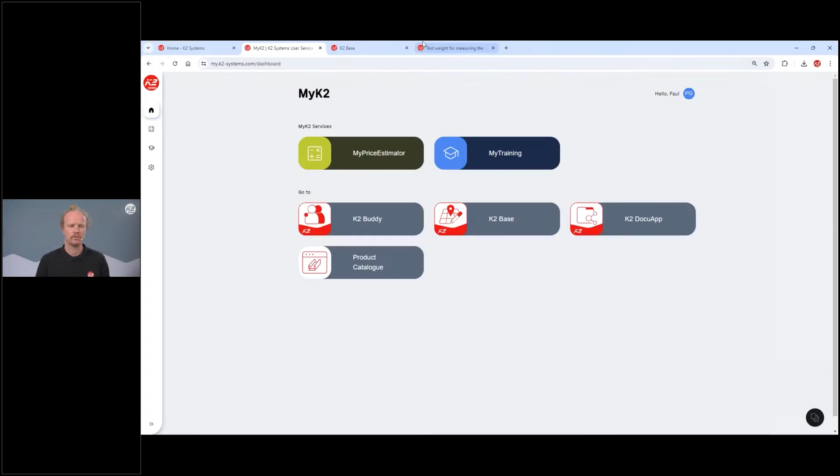So going down to K2 Base, you can click it this way. It doesn't really like it when you have two pages open, so we'll just close this one. And now I'm in my K2 Base account.

These are some of the projects that I have made, or we have made as our webinar team. However, we also have the option of looking at projects from other people in the company. So if you have a company of 10, 20, 30 employees, they can all have their own Base account. From there, you can access projects made by other people in the company and work collaboratively on those projects. Also a great way of sharing, if someone is sick one day and you need to get that project finished on time, you can continue their work who have already started it.

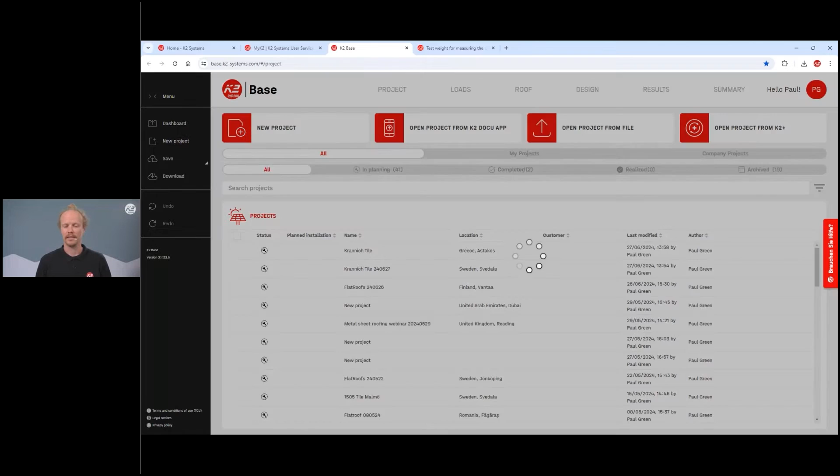So to start a new project, we can jump back, just to the all projects page. You can start a new project here. I've already begun one, there was one this morning that we did with the German team, but we're going to just start one in Greece today. So the location... oh, we've already got a bit too far, let's delete everything and start right from the beginning. I think that's a good idea. So we have one on one of the islands in Greece, I believe, and we can put a name to it.

We're just going to call it Krannich tile webinar today. If we had information we wanted to provide for our customer, we know who they are, we know when it might be planned, we can put in this information that makes the project look a little bit nicer, a little bit easier.

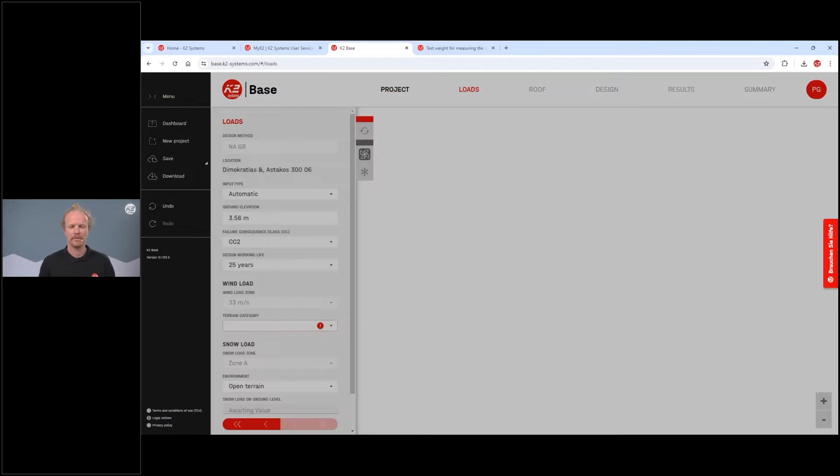However, this doesn't necessarily mean anything for the static part of things, and that's probably what we're most focused on today, the static side of the PV installation. So for this one, maybe Klaus, the man behind the camera, can be our contact person, and we can put some details in for that. But moving forward, we need to know what is going to occur on our rooftop when we're putting PV.

For many countries within Europe, there are the European standards, which are an overlaying set of requirements. It's not so much a suggestion, but a minimum required standard which things should be built to. So if you have any problems in the future, you can say, I have built to the European standards or country-specific standards. And if there's an issue with products, insurance, or whatever, you can refer back to that document. These standards are a little bit different in each country, but the general feel is the same.

You have a wind speed or a snow load. In Greece today, we're probably not going to have too much snow, but we have a wind speed that's expected in this region. And we need to know what sort of terrain is around, because wind in a really open space is going to act a little bit differently than in a closed space.

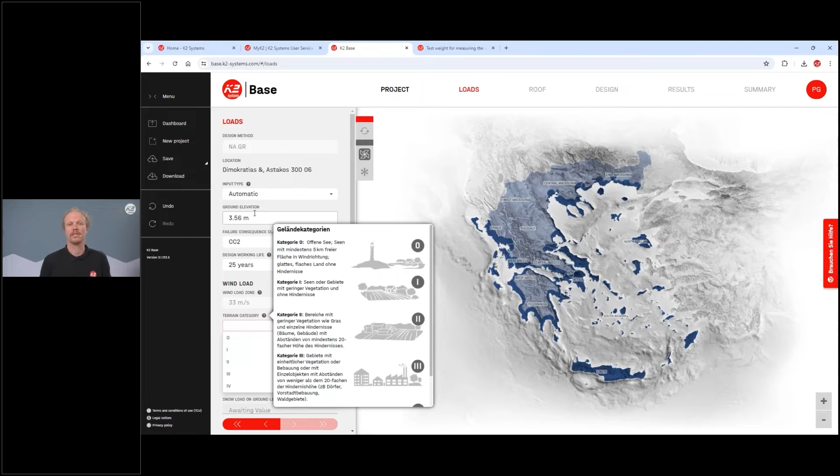So if you think about it in terms of a calculation we're trying to solve, these are all of our inputs that we need. They are set: your project will be at a specific location, your project will experience so much wind, and it will have a specific terrain category. So here we're right on the coast, so we can select number 0 for the terrain category.

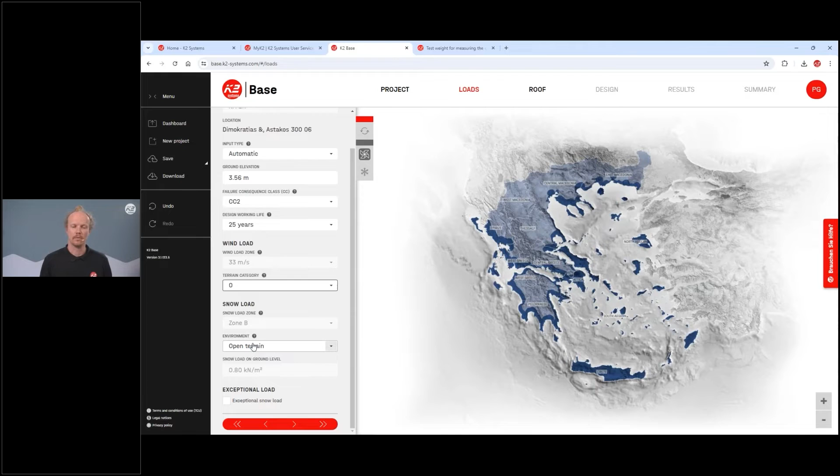In the snow sense, it's not so much of an issue here, but if you're in a more northern region, or in a mountainous region where snow does exist, the same sort of things happen. So the map will be a little bit different for how much snow is expected. There's also information about the topography of that section. These are all taken from the Eurocodes and the National Annex, and this is sort of the safety net that ensures that the product, if installed correctly, will be securely placed on the roof.

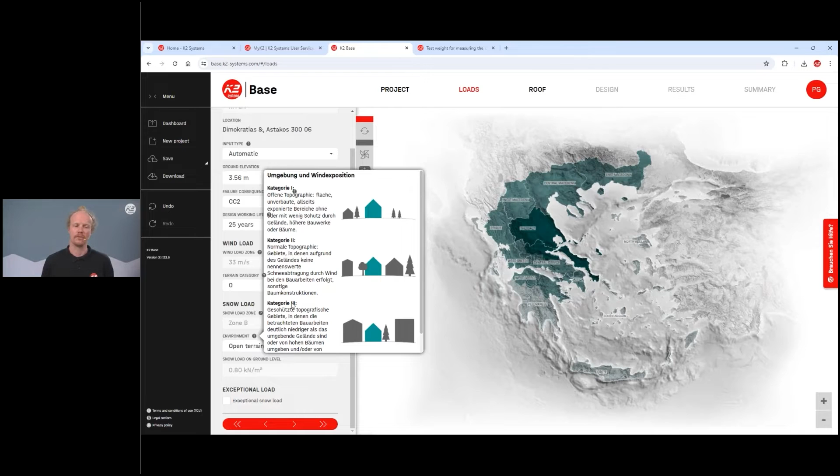There are a few things you have to choose as an installer or project manager about how much safety you would like to add to the roof. These are all also defined by the Eurocode, and they relate to the design working life. So you can have a 25-year working life or a 50-year working life.

Of course, if there's any information, it will pop up. Here it has popped up in German, but that's only because my computer is in German. However, my base account is in English. So if your computer is registered in English, or in one of the 30 odd languages we have input in base, you will have this information in that specific language.

Also important is the consequence class. So here this is an input. Again, unfortunately it's taken from German for this webinar, but if you open it in your base account, it should open up in English. It provides a little bit more information from what the standards specify and how to categorize the project you are doing.

Effectively it's an option for if something bad is to happen. So if the modules come off the roof, what is the consequence that this will lead to? If it's in an agricultural field, there's not much walkway and not many pedestrians walking underneath, so the chance of damage is quite small. However, if you're in a quite crowded area, then obviously if something does happen, the chances of it being critical or major are higher, so we need to take this into account when planning our project.

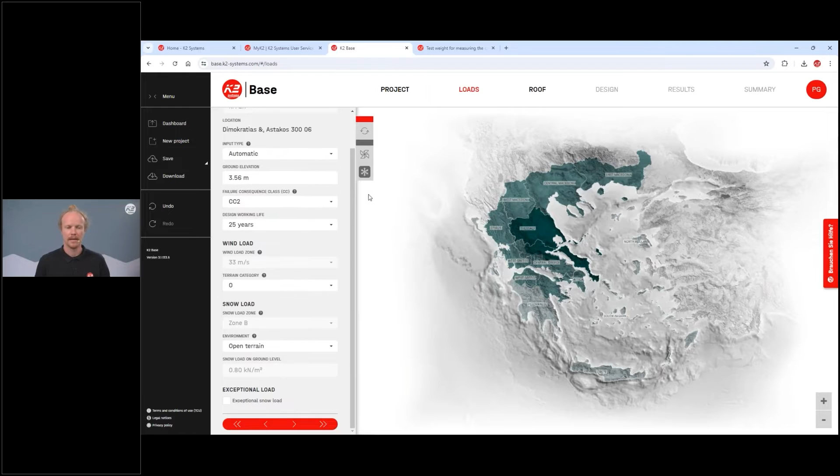So once we've got through with our loads, we can move on to our roof project.

This is also an important input part of base. As I was saying before, these 3 parts here are our input values. They exist, there's not so much we can do about it, but it's really important to make sure they are as accurate as possible, because this is a simulation, and if you put poor information in, you will get poor information out. So in this case, it's really important to make it as accurate as possible.

If you are unsure about what the part is, it's a good thing you're here, because then hopefully you can learn a little bit. But there is a lot of information on our website and on YouTube as well, explaining the little bits. So in this case, I want to build a roof. I want to build some PV on this roof here specifically.

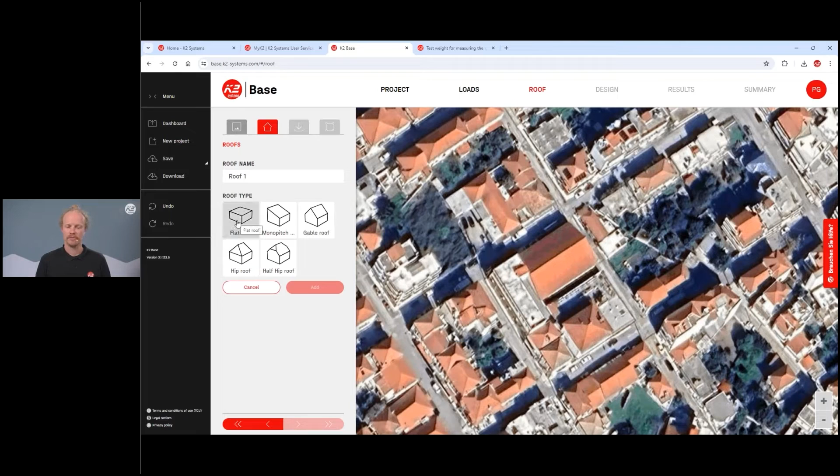I have the option of a flat roof, but this is not a flat roof for us. We're defining a flat roof as something that's from 0 to 10 degrees and made out of a gravel roof or a concrete roof. For anything above 10 degrees, the roofing shell or material on the roof is a little bit different. So tile, trapezoidal, these are some of the major ones. And if you click on them here, you see the options that are there.

It's important to select the gable roof if you have a gable roof. The reason comes from how the calculation is done. A monopitched roof and a gable roof, you could argue, are very similar. However, the calculation itself takes this information into account, and you will have a less accurate report if you use the wrong one. So monopitched is just a one-sided slope, and a gable roof is a two-sided slope.

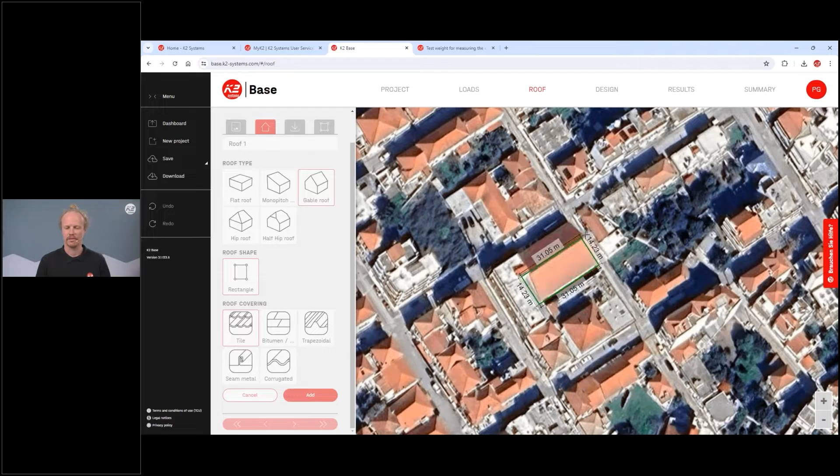So we've got our gable roof here. We're going to use a tile roof, as we said before. Then, starting on the low end of the roof, within a couple of clicks, we can just draw our roof. You'll see here it's not exactly overlapping the picture that's there. Maybe I can turn off some of this just to make it a bit more clear. This isn't incredibly worrisome, it just potentially doesn't look as nice as it could.

The reason is that almost all of the satellite images are taken at some slight slant. You can see, with the shadows and the wall that is here, that we're not directly over the roof. What's important is the location, which we've already set from the project part, and the distances relative to what is actually in existence.

So in this case, I could just do it as per the Google Maps. However, if I had any information from site, this would be more important to fill out than what we do here. Maybe I don't have so much information from the workplace, I'm just doing an initial plan, so I'm going to put in some random values. It does look like this building is quite high, so I'm going to put it as 18 meters.

Maybe we have a sort of 27-degree slope. We chose before that it was tile, but if you've made the wrong choice, you can update it here as well. And here we can put in some building information in terms of the distance between the rafters, the width of the rafters.

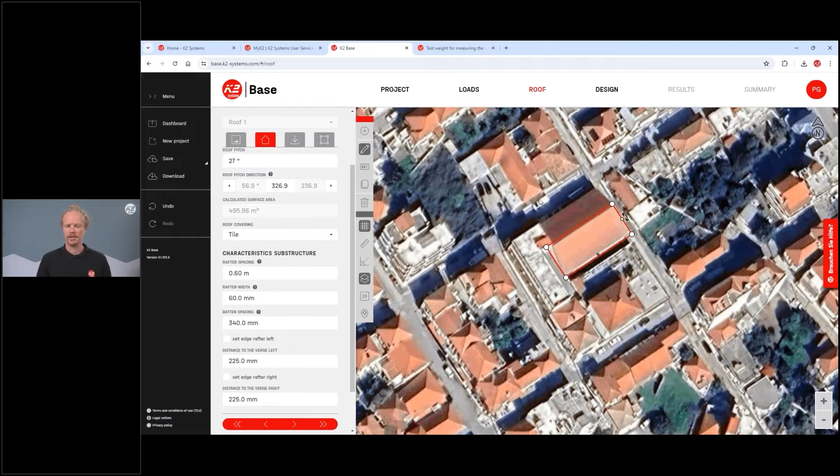So there is one way - this has been one way of filling out this information, and you can use this drawing here. You get some options of putting in the information manually as well. So if you did have a bit of information from site, you can do it this way.

There's an option of having the satellite view that we have, but there's also the option of looking topographically, directly over the roof. So in this case, it was 27 degrees, coming away from that 27 degrees, looking perpendicular to the roof.

You can also see that these values have changed. So now we're at 15 or almost 16 meters. And if we look at it as the satellite view, we're at 14. That's just because we're going from that bird's eye view now to being perpendicular from the roof.

We also have the option of toggling on and off quite a few different points, and you'll see this more on the next part. Here are the rafters. We've put in this rafter spacing of 0.6 meters. If we're not sure what that means, we can click on the question mark, and there will be a nice little picture which explains most of what we're looking for.

This is something we see often in different regions, and here I'm just putting in some random values. In Sweden, for example, the rafters are a lot wider apart. You also have situations where the rafters don't necessarily start from one side or the other, or they might have a specific distance from the edge of the roof. So you can fill in this optional extra information, like adding a rafter on the far edge, and then maybe the first rafter is 1 meter away, and everything works backwards from there.

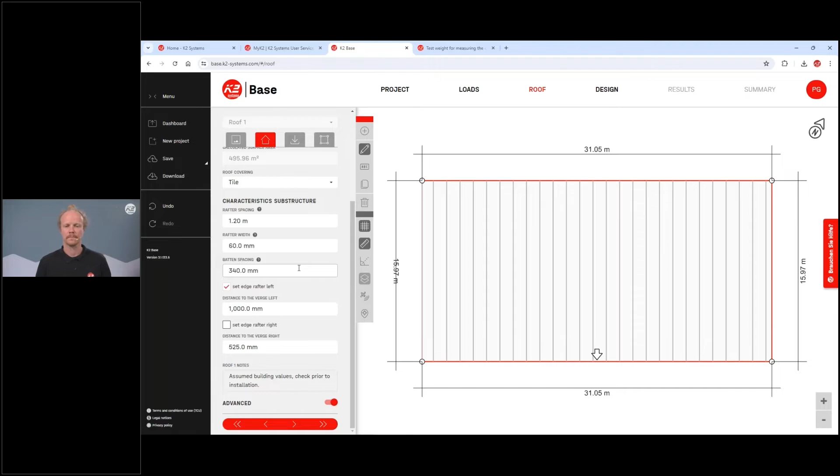No, we have no questions until this point, but for later on, when we choose the modules, we have a bigger question. Okay, let's go.

Wonderful. So now we've got our roof, that's all sorted. We're going to jump into our design part, and this is where we choose where to place our modules and what to do with them, and choose them as well. If we know our modules, which hopefully we have some idea of at the beginning, we can pre-select a module from the database, which is in here.

There are hundreds of thousands of different modules. If you have one that's not in this list straight away, you can just type something and find other ones. The one we had before was this Axitec one - it's one of our preset ones that the system knows we've used before, so it's put to the top of the list, making it easier to find if we use it again.

If we have a module manufacturer in the system but we cannot find that specific module, we also have the option of requesting to have one added to the system. This database is an independent database, so we're trying to keep it as up to date as possible, but the more modules that come out, the larger this database grows. So if you've got a newer module, or one that's a little different, that you can't find, you can put it in here and we should add it as soon as possible.

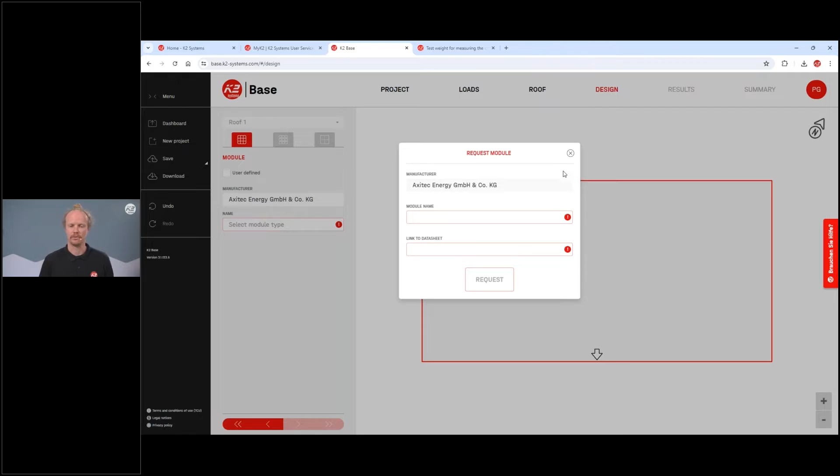So this is one that's already been pre-filled. However, if you wanted to use a module that you didn't have, or you just had a rough idea that you wanted a 440, 450 module with a rough size, you can fill in the user-defined version. Maybe you've got a slightly odd option or a different shape that's not in the system, you can fill it in here. So there's a lot of flexibility there.

But we'll just jump back to this one. Justin, was that what the question was about, or was there something else we could go into there? Something else, it's about the planning - when I design a system, should we do it later on? I think we'll just go through it, and if we get to that point, maybe just interrupt, or we do it at the end.

Okay, so now we've chosen our module, and now we have the choice of choosing a specific system. The single rail and the solid rail are the two more common ones that we would use for tile roofs across Europe. These refer to a rail type. We're not going to go into too much detail now, but the single rail has a fixing channel on the side, so it's a little quicker to install in certain situations. The solid rail has a fixing channel down below, which provides different advantages, and there's a larger range of rails, which in situations with really high snow can be beneficial.

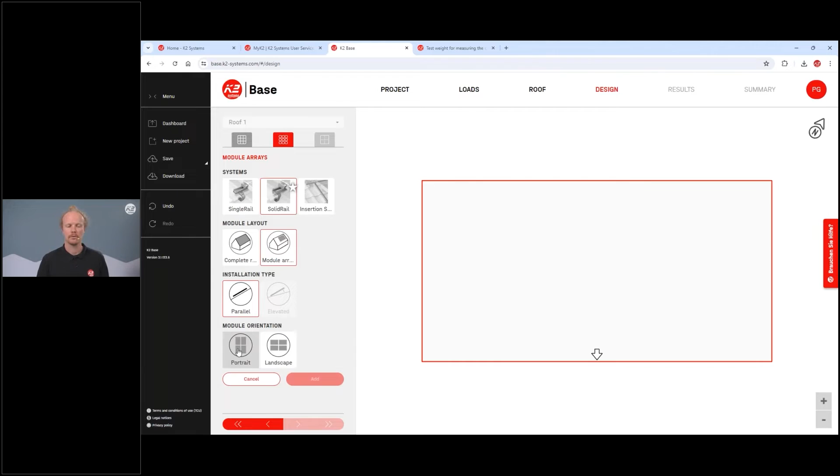So I'm going to click now the solid rail. I have the option of portrait and landscape. Portrait for tile roofs in many cases was the ideal option, and the reason is the fixing location. I'll put back on my roof rafters, and you can see now, hopefully, that when the rafters are running this way, we can run rails horizontally, which means we can clamp in an easier way.

I'm just going to jump forward before jumping back to see what I mean, that we have our rafters running vertically - I can turn my panels off. Our rails now will be running horizontally, which means our modules can be clamped in the most suitable location if they are also running vertically.

So we can play around a little bit with what we're going to do here. We've got this roof front view at the moment, but we can also plan it like this. So if we had a chimney or something on the roof, we can avoid it. It's quite easy to move the modules around.

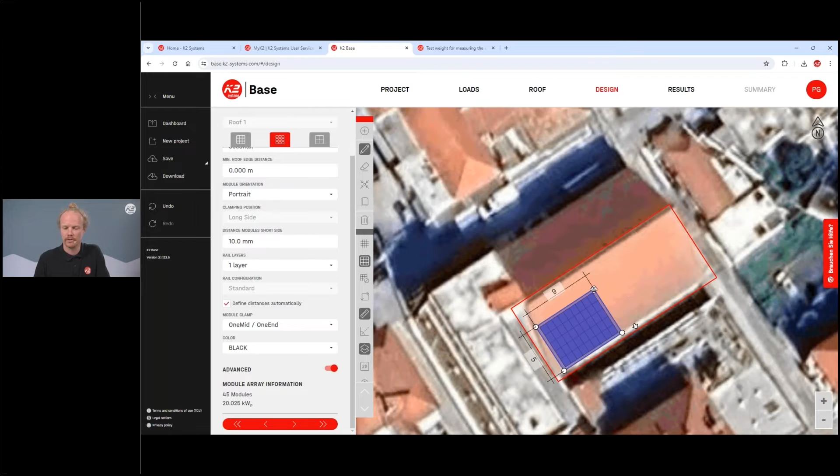If you want to put some in, there's a yellow line here, which we'll discuss in a little bit. But if you knew there were a few modules missing here, one way of getting rid of them is to use this eraser button or delete modules - you can delete a few, and if we jump to the 2D view...

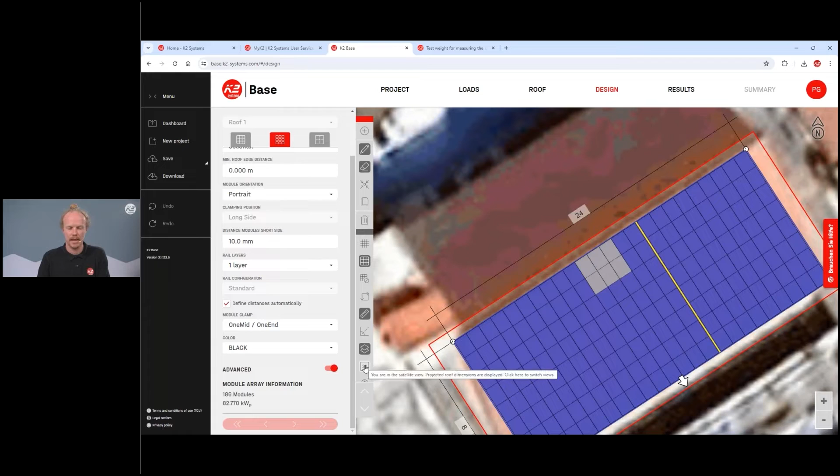This is probably more suitable for the larger flat roofs, but there are also some shortcuts. If you press Shift and click on a module, it will delete the whole row. If you press Control, you can delete the whole column. And if you press Alt, you can draw a square that will delete some or more of the modules than before. So we'll just leave it as this for the moment - maybe there's something on the roof, or planned to be on the roof, that's not yet there, but we don't want to build a couple of modules there.

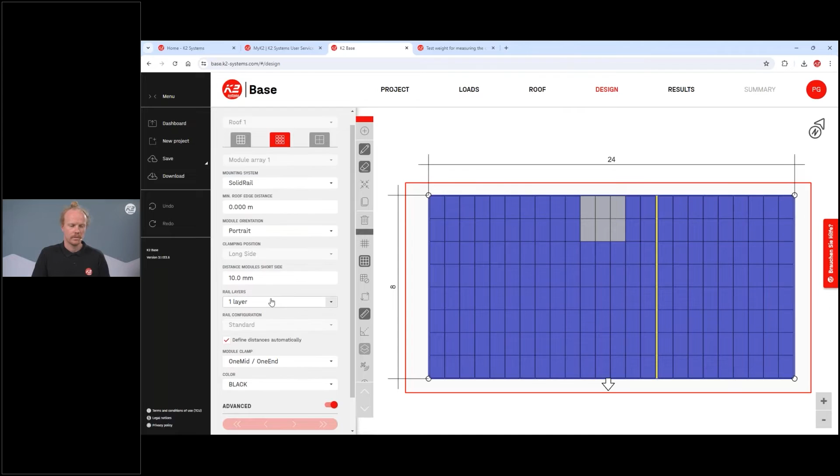When we're still on this page, there's also the option of viewing it quite differently. Maybe you want to know the distance from the roof edge rather than the number of modules. You can set this up specifically using this tool, setting maybe 2 meters from this edge, and it's going to move all of the modules away.

This would be more of something you would do once you have the plans for the system, where you already have all the data rather than assumed values, and here you want to be quite precise. You can align the different sections, and it's also a good way to check that the calculation and planning is in line, because maybe your designs have a 2 meter gap on this side and a 2 meter gap on this side, and then something's wrong.

Maybe the rails are calculating something that hasn't been accounted for in the plans, or maybe there's one module too many that you thought might fit, but actually now it doesn't fit. So it's a good way to check those precise values that you have as well.

You'll also notice now that we have a yellow line running down here, and this is our thermal gap. The thermal gap topic is quite important, actually very important, for all of the systems that we have, and it refers to the distance that one rail or one set of connected modules has before there's a gap occurring.

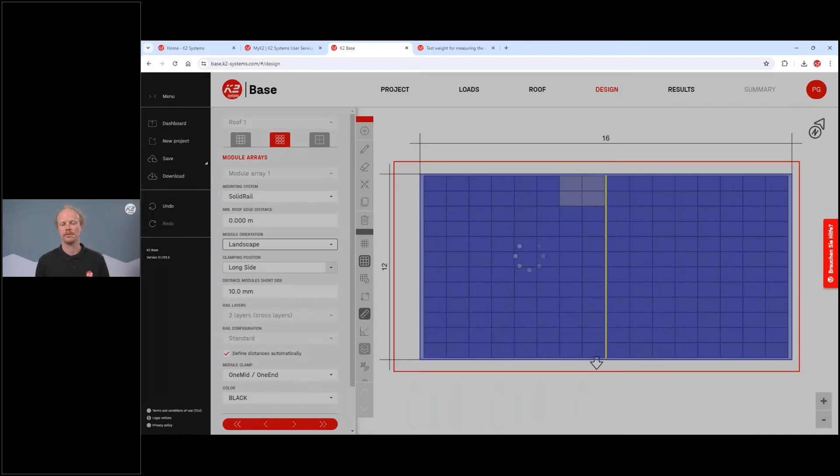So I'm just going to jump back one more part here, because this is our play section of the tool. We've put in all of our information, and now we're going to decide what we're going to do with it. We had the option of the portrait before, but if we wanted to do a landscape option, so our modules are now facing or running horizontally, it's going to be a little bit different. We will have to do a 2-layer system. The reason being, we want to ensure that those modules are clamped on the correct or ideal positions, which is roughly 1/4 in from both ends. And to do that, our rails have to be running the same way.

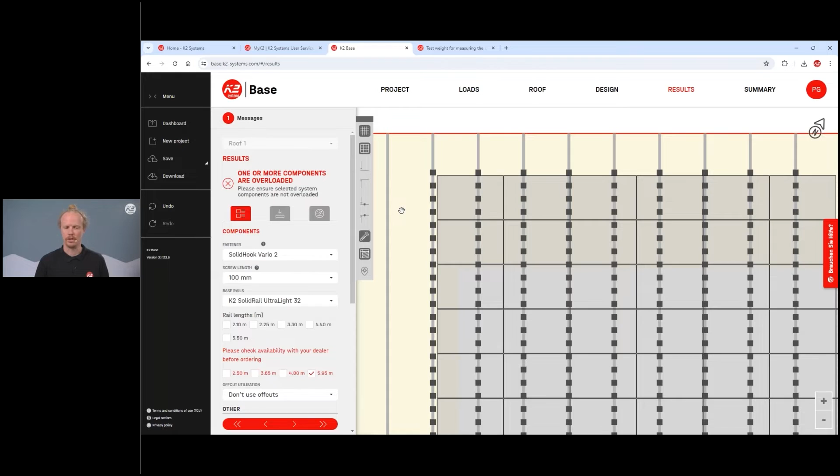Just jumping one forward, this is looking quite messy, and it was just for demonstration. I wanted to show that if our rafters are running at 1.2 meters, obviously our rails cannot run the same way because the rafters don't match with the modules. So in this case, we need the 2-layer system. But we'll stick with the 1-layer system at the moment. This is sort of the ideal setup.

And we have the option of selecting different clamps. So if you know that something is specifically in stock in your region and you want to use one clamp over the other, you can select that here. There is also the option of silver and black in terms of which versions of the products you're using.

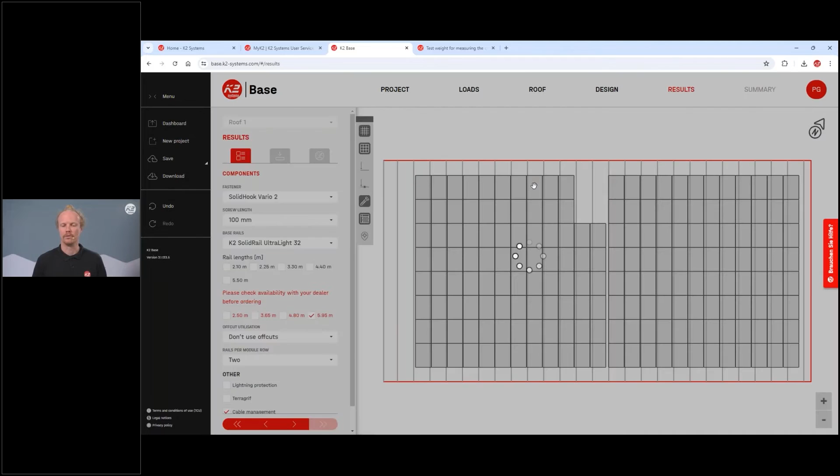So once you've made all these decisions, we can then go look and see what we have on site. We'll jump back onto our base project, and we will see here that we have a very important message: one or more of the components is overloaded, and this means that we should stop and reconsider something. We've put in our building data that we can't change, but we can change either something in the design section, or we can change something that is here.

But to get a bit more information on what is wrong, we can click through these sections here. These are part of the calculations that we see. The snow and wind loads get converted into pressure for the building slope, so we test the loads on the modules that are here as well. But we can also then look at the utilization. In this case, everything's overloaded, so we have not really selected the right product.

Or if you remember at the very beginning, I changed the roof spacing from, I think it was 65 or maybe 70, to 1.2. And so for this 1.2, it's not a suitable rafter distance.

If we jump back, our roof hooks are overloaded. That's what's represented here. Our base rail is overloaded, and we also have a cantilever that is too long. So I can get an idea of what all the problems are and maybe how to fix them. I know just from looking at it that this cantilever over here is too long because we have a rail that's just extending all the way out here.

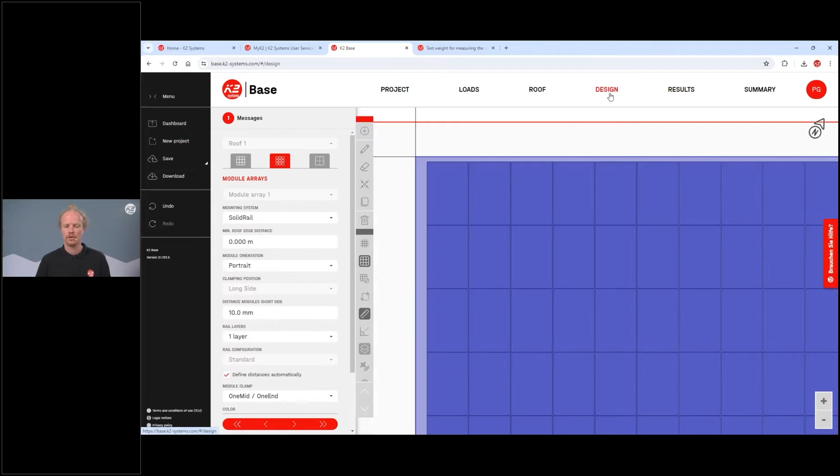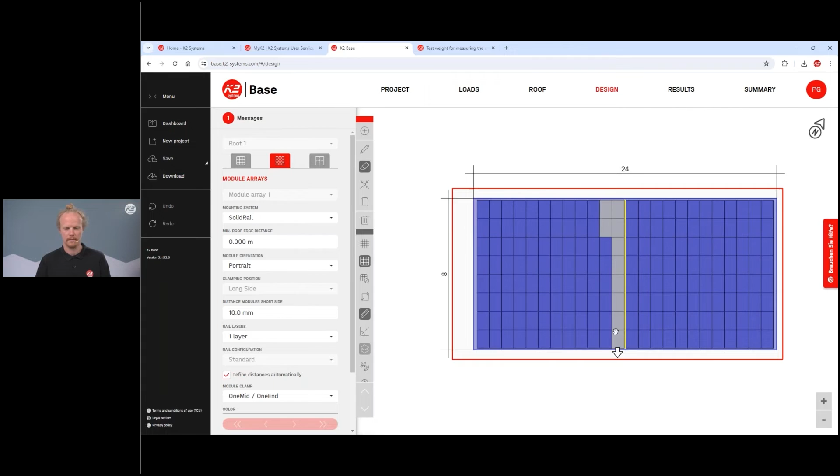So I could maybe delete these modules here—that's not what I wanted to do, sorry. And so our cantilever now is gone, but we still have the problem that our rails and our system are overloaded. So maybe we want to use a stronger rail. Our base rail option is in here. I can have a look now and say, oh okay, so my rails are now not overloaded, my tension's not overloaded. And maybe I have a different hook that is more suitable for this situation.

And so this one's not going to be suitable as well. So we might have a situation where actually no product is suitable, and then you might have to look at a different solution. This is where K2 can help internally by you sending us the data and saying, hey, I have this setup.

I can't find a solution for it. Is there a product on your range in your catalog that could be suitable? Because Base provides, I'd say 95% of all the things that K2 are selling, but there are always certain situations where the products don't work or the system doesn't work. In these cases, we have an internal team that can look at that themselves.

So I confused myself a little bit right at the beginning by making that reference to the 1.2 in Sweden. So if we put it to something that's probably more realistic for what you would see in and around Greece, and then just wait for it to kick back up.

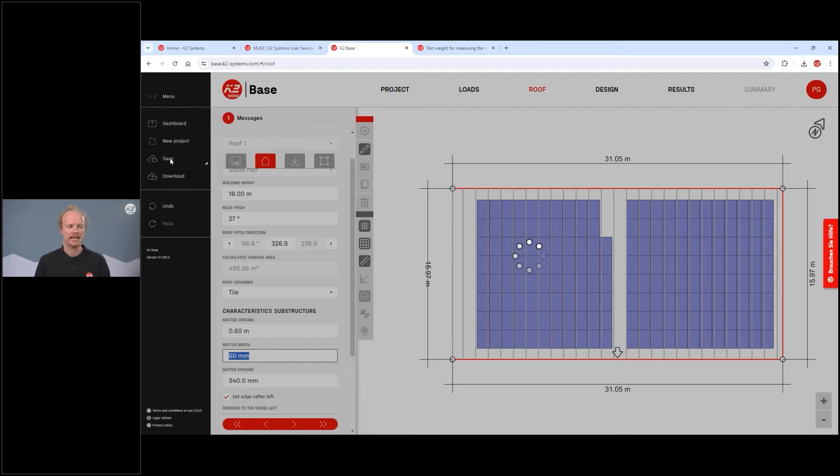I should say at the moment, Base works really well moving from left to right. But if you ever have to go back and change the loads or change the roof, there is the potential that it may just need a moment to recalculate.

And so now we've updated it, and it looks like it has not quite fully updated. Let's try to reboot it. There we go. So now those rafter distances are much closer together, which is what we put in before.

And we have an option that everything is in order, and we can see that everything is below 100%, and you've got this green tick, which effectively means we have planned the system in a way that, if built correctly, K2's covering everything. K2 has done the calculations from the wind and snow analysis, done their tests on their products, and also tested the interaction between the products and the fastening material, whatever that is. And we are comfortable as K2 for you to install this system.

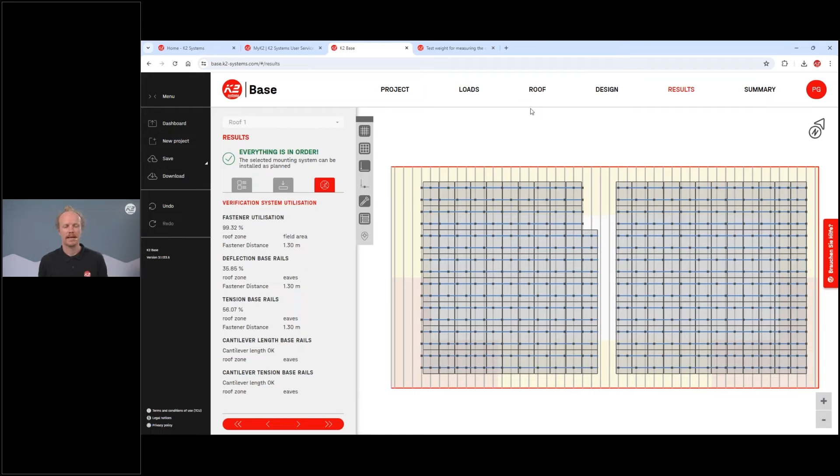That's probably a really important point to know as well. This tool, or the software, operates as a tool for you as the installer or the project manager to do the calculation for yourself. So we cannot take responsibility for the inputs that you put into this software, but the calculation that happens behind that is all then done by K2.

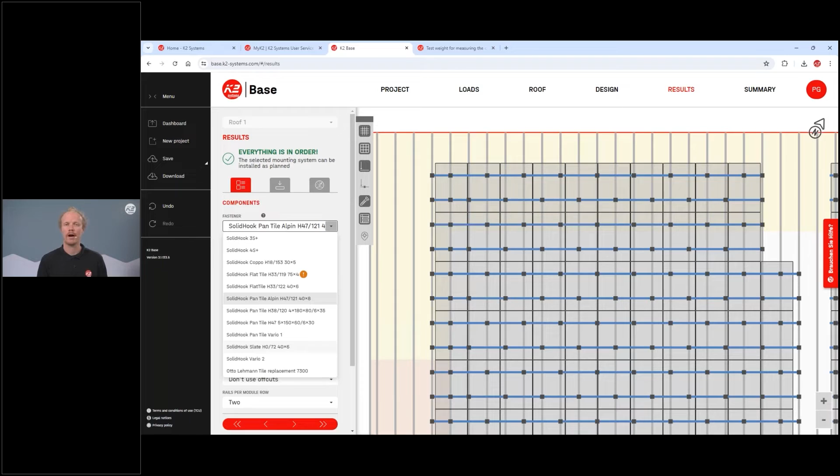I should preface this with: this specific roof type, the tile roofs, you do have a lot of options here for different products that K2 selects. What is really important though is to ensure that the tile hook you have is going to work with the tile that exists on your roof.

So everything else on this page you can kind of play around with and set the modules where you want them. Once you get to here, while there is a long list of tiles, it's important that you have also done a physical check on the tile that you have and the tile hook that is related to that.

And we have in the question mark a small overview of which tile hooks are suitable in which situations. But on the website that we have as well, there's a matrix that has a little bit more information and shows pictures of which tile hooks are suitable with which tiles. I highly encourage you to refer to this matrix and this document before selecting the tile hook.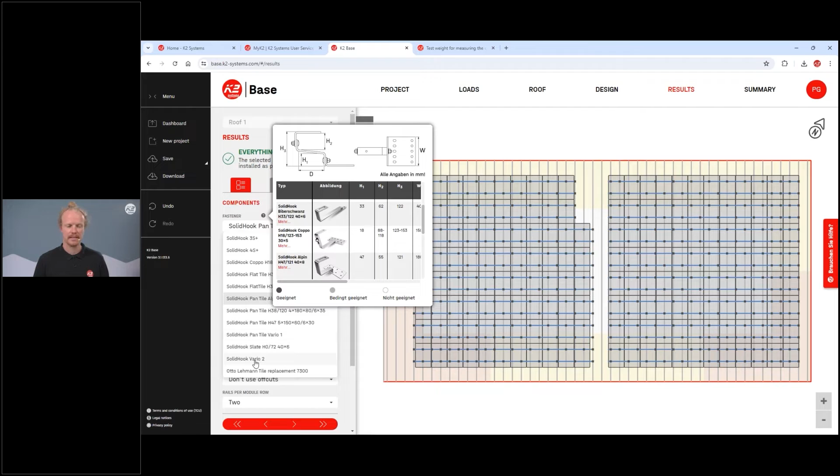So in this case, I think the first one that we got was the Vario 2. That was the one that just came up at the beginning. So in this case, it's not potentially going to be suitable. We can see that it's overloaded.

So what we could say is, all right, well, let's see if any of the other ones work. We know that the Alpin hook works, so that's great. But we should then test it against the matrix that we had and just ensure that the tiles and the tile hook are going to interact together.

So once we've selected our tile hook and the rail type that we want, we can also select the quantity of it. So if we turn off a few things here — Base shows a lot of information, so it's good to have a bit of an idea of what it all means and where and how to view it.

So at the moment, we are just looking at the rails, the modules and the roof, right? And the rails can be made up of different lengths, because we sell all of these lengths. However, the warehouse that's near you, or maybe what you know you have on stock, it might only be one specific product.

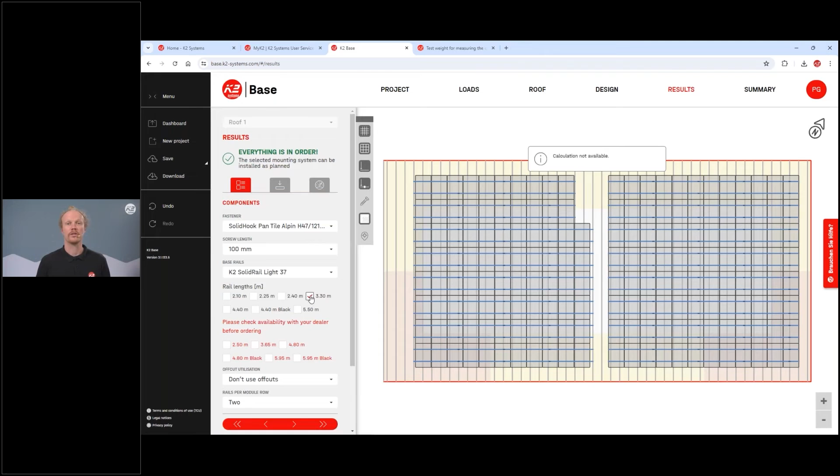And so if you're not selling, or if you're not able to get the 4.4 meters, you can still do the calculation, but you just have to ensure that you select the 3.3 meters, and then you'll see that the rails will be made up of 3.3 meter lengths instead of 4.4. If you have multiple ones in stock, you can select most of them, and then Base will optimize this and give you the best solution for the rails, to go with the clamps and the hooks that you already have.

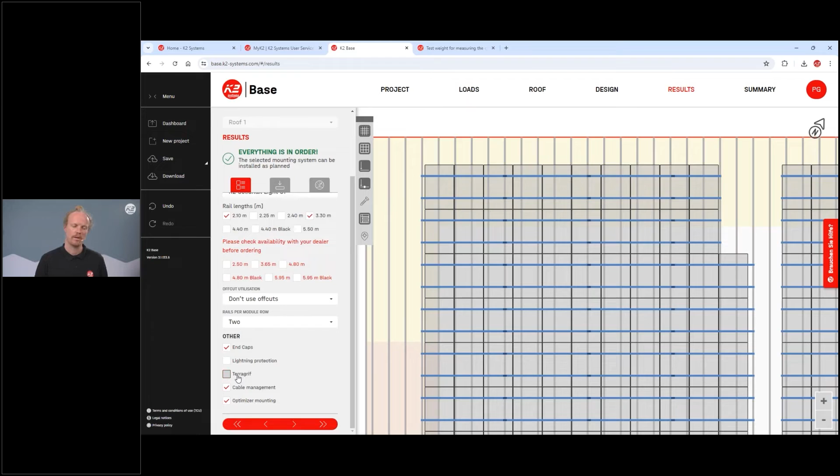There are also a few optional extras as well. So if you are using optimizers, you can add them in here, and this will add a specific product to the system. Cable management and clamps all have different meanings and different products, and maybe we'll put the Terragriffs on as well. When we get to the next page, we'll see what that means.

So we've spoken a fair bit about this specific page. Probably the one other thing that's useful, really useful for people doing the first or early installations, is the colors here that you see—maybe I'll turn these off.

These colors represent the zones on the roof, which are also defined by the Euro codes. So generally speaking, if you're at the corner of the roof down the bottom in this red zone, you will experience, or the modules will experience, more wind. So if you're going to put PV on the system and it's not possible to plan in here, it might be possible to plan in the middle, because the roof as a whole has wind acting a little bit different depending on where you are.

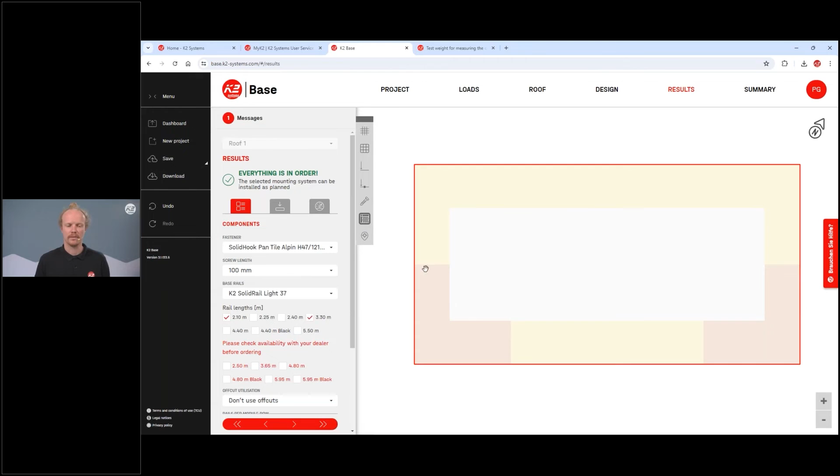We go into this in a lot more detail in some of the other webinars and videos that we have, so I don't want to discuss it too much, but to give a quick demonstration, if we move our modules away from this corner region—you can see here that this module is in the corner region and it has 75% for the fastener strength, and the other values are there. But if we select it somewhere in the middle, those values are changing. It has gone up, but that's for a different reason.

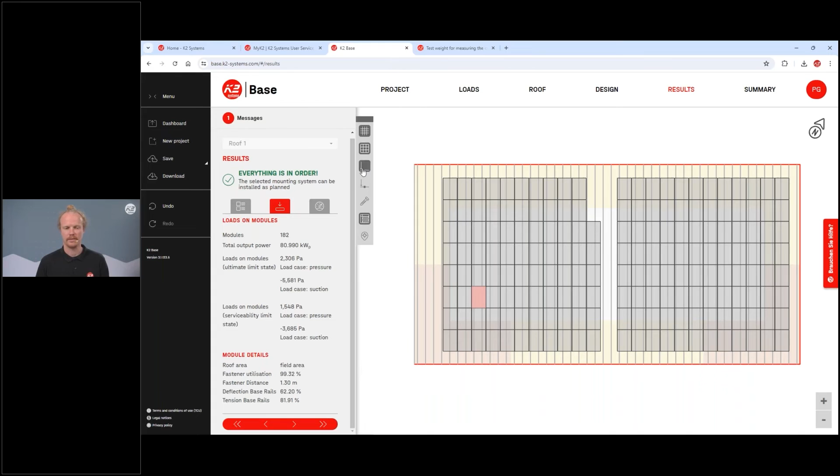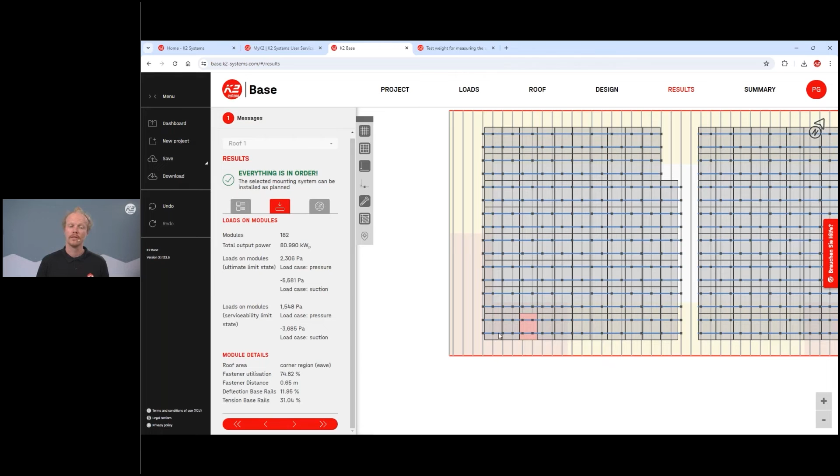And I have now got back to, I think, my level of complexity that I didn't really want to, but we are there now. So on the corner, we're putting one fastener on every rafter because we have to, but in the middle, we don't have to put one on every rafter because the modules aren't experiencing so much force there. So if you see something overloaded, it might only be on the corner, and you could say, all right, I don't want to put modules on the corner—let's just make this a little bit different.

And we can bring this in. Yeah, I don't have as many modules anymore, but the building and the situation may specify that that has to happen. So in this case, I could get away with it, but in other cases, I potentially have to build only in the middle of the roof due to the snow and the wind that will build up in the different regions.

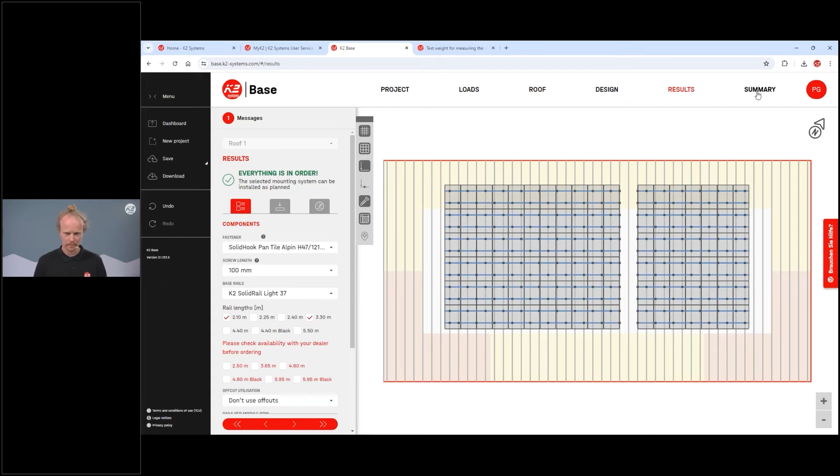So then moving on to our last page, this is where we have finished everything in our summary page. And from here, you get a really good overview and the opportunity to export to different parts of our software, but also the software of other companies as well.

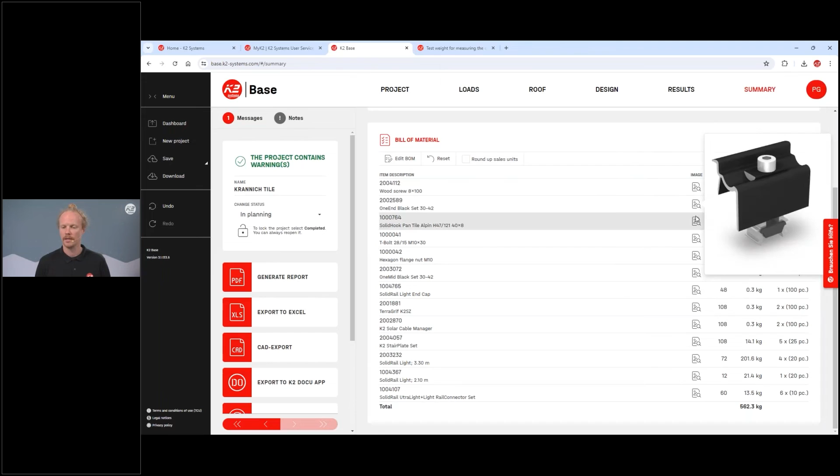So if you have multiple roofs, you see a small overview of that information there—the power, the modules, all of the components that you're going to use on the roof—and you have a nice little picture of them as well, depending on the part that you have. I spoke before about adding optional extras, so here we have the TerraGrif.

It's been added now because we selected it, we wanted it, and we can put that in there. We also have the way of exporting to a number of different functions. So the probably main one that we export to would be the report, and the report provides a range of information which is useful for different parties.

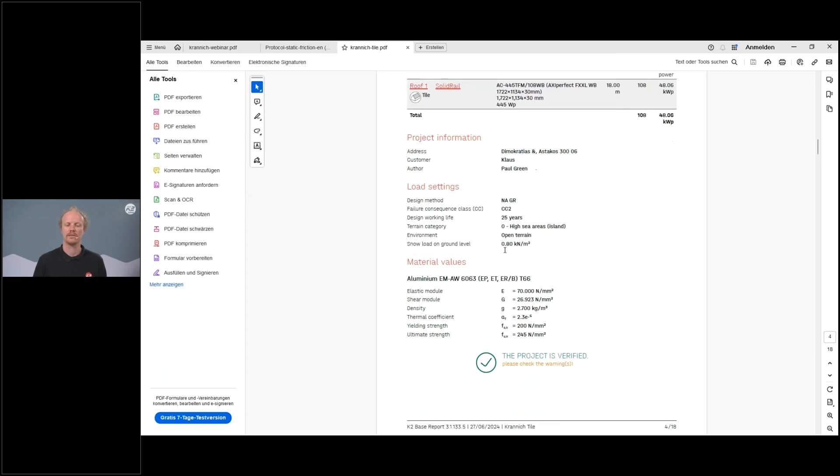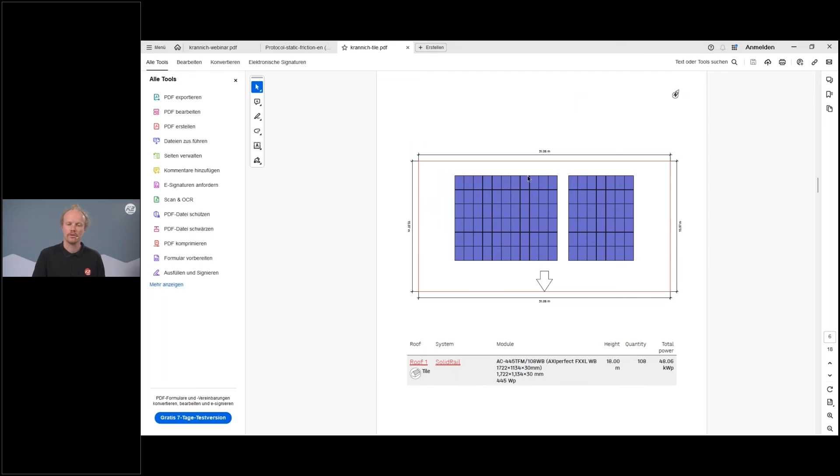To give you a quick overview, we have not all of the terms and conditions, but a general overview from K2. All of the input values that we've done, so where the project is, which modules we're going to use, which snow and wind loads we have to use according to the Euro codes. We have a nice picture of the project, a layout showing the roof dimensions, and how to cut the rails up.

So for the installers on site, this can also be a useful part of this document, including specific distances between rails that you need for that installation process.

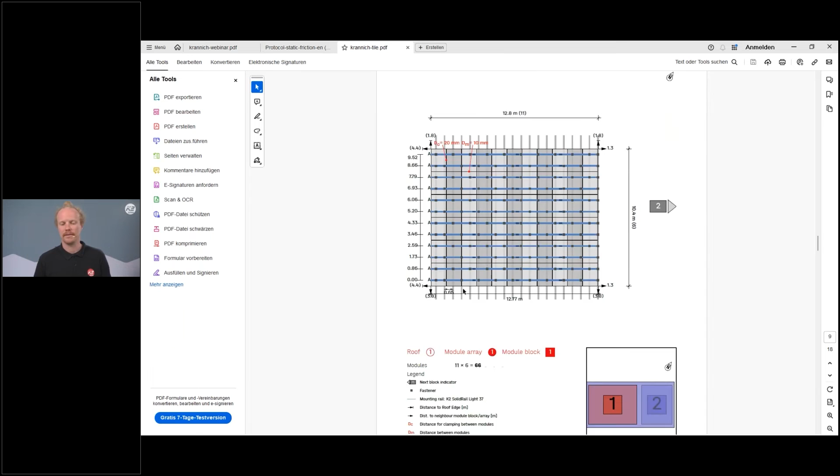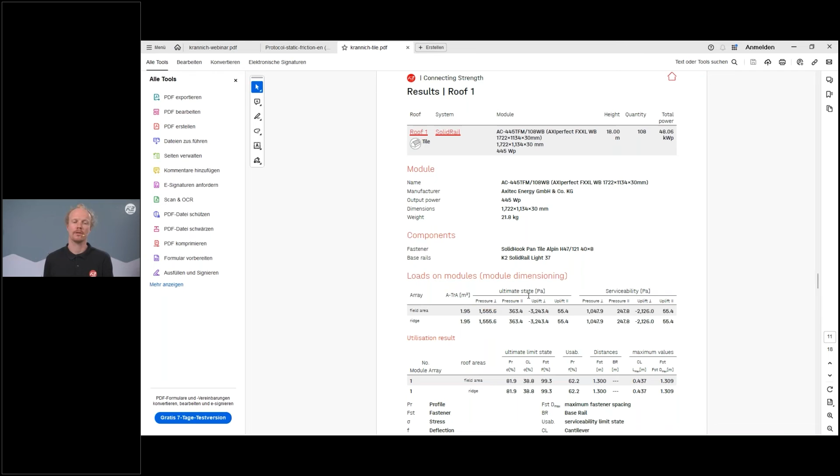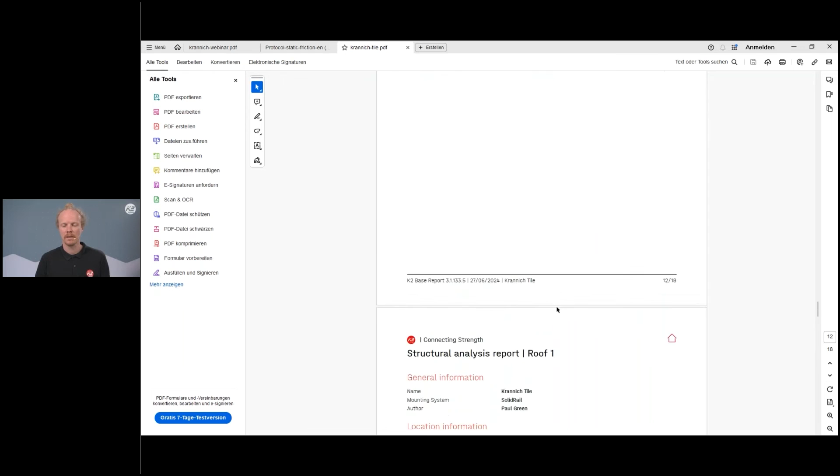And if we scroll down even further, we get to the calculation that has occurred within the software. So you've done the project, you've built it, 5-10 years later you have a problem. If you have this document, you can say, well, this is the calculation that K2 has done. I have built it to standards, to all of these standards that are listed here. I, as the installer, am covered.

You also see at the very bottom, these are all the calculations, so it is quite in depth. Not all of it you need to know, but it's good to know that it is there. And then at the bottom, you have the bill of materials as well.

Just jumping back, the bill of materials is probably one of the most important things because you need to buy it at some point as well. Usually what you've had to do in the past is download a bill of materials as an Excel document and take it to your local distributor. But now what we have is an export function, but also to a number of other software in terms of the inverters and string design. That's a little bit different to what we'll talk about today.

But we also have the option of exporting to a specific distributor's warehouse, and then from there you can purchase it as well. For this webinar, I've pulled up all of the Krannich ones that we have in there. Depending on the country you are in, you probably only want the one that is from there. We're always looking to add more and more to the system, so if you don't see your country here now, don't be overly concerned.

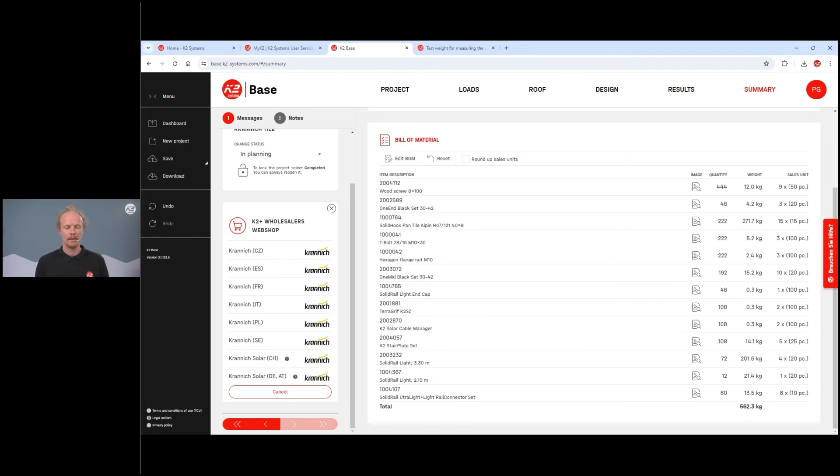I know the Krannich K2 connection is strengthening rapidly and quickly, and I'm sure that the country will be there quite quickly as well. Simon, I might then pass over to you to show everyone how they get this K2 Krannich connection sorted, because this is something we've set up already for this webinar. But if someone's got a new account with K2, or if they're trying to set it up, how would they go about ensuring that this connection is possible?

Thank you, Ciaran, for the excellent presentation. I'm Simon van der Veer from the German Krannich Solar, Central Sales Department. I will show you how it looks, the magical moment when you use the interface to bring the components to the web shop or to your wholesaler.

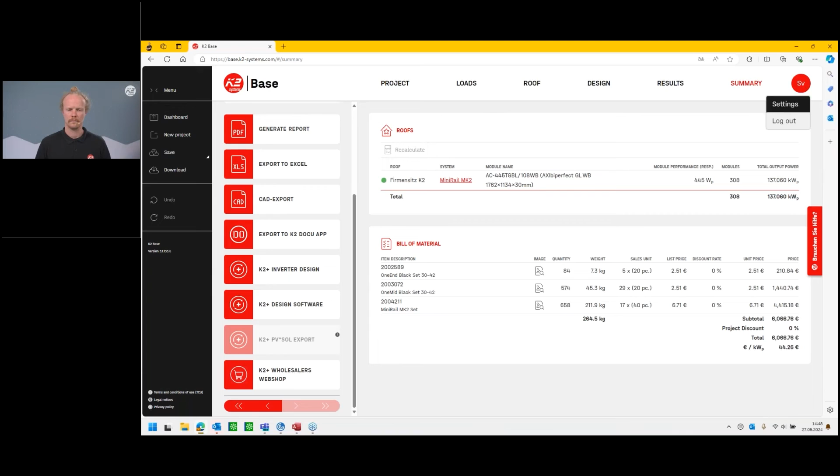First of all, I will show you how to maintain your favorite wholesalers. For that, you click on the settings in the right corner. Next, you click on one of these links, view company profile, and after that you have to click on Webshop Connect.

Then you have to choose your specific country. In my case, it's Germany, but you will also find the available wholesalers for other countries. In Germany, you have a bigger amount to choose from. Of course, I will choose Krannich Solar.

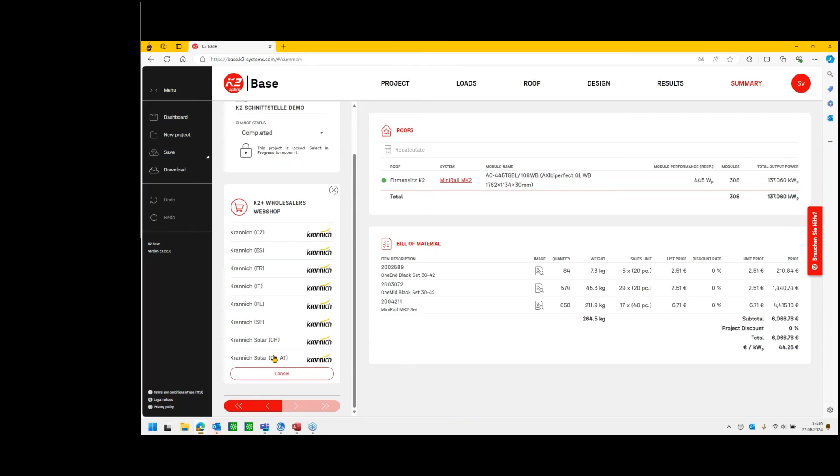So once we have maintained that, you can go to the function in the summary. Here at the end of the list, you will find the button, and with one click you choose the wholesaler, your favorites you maintained before, and then the web shop of your wholesaler will open automatically, and the articles will fill in automatically from K2 base into the order list of our web shop.

After that, you are able to add more articles, put it in the checkout, make a duplicate like this, download it, or delete it.

Yes, that's my part. If you have further questions, don't hesitate. Thank you, Simon, for the explanation.

Yeah, we need to come back to Karen. We have a lot of Q&A. I forgot one important point, sorry. It's very important that you use the same email address for K2 and the wholesaler web shop so that you can use this interface. Thanks for adding that. We received a lot of questions, some really in detail. I'm pretty sure we cannot answer them all, so I'll choose a few that are really interesting and helpful for all of you in the basic training.

So Karen, the first question is: is there a solution if I have an installation in between the rafters? Where can I bring my hook there?

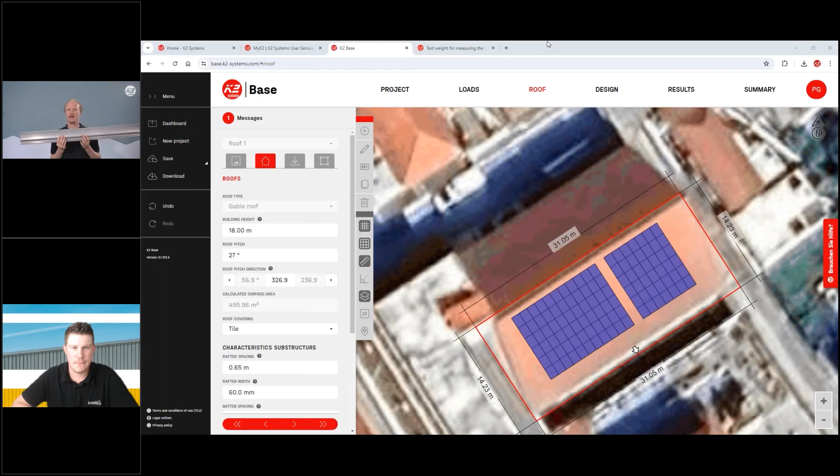For some of the products we have, like the single hook and the solid hook 3S and 4S, we have this single board which comes in 2.2 meter or 2.1 meter lengths. Thanks, Klaus. It operates as a bridge between those rafters.

So in this case, it might not be necessary to put one here and here. But if your rafter spacing is wider, or you're close to the edge, or you want to put one on the edge of the module field, you can use this product. You can still see my screen, right, Justin? Yeah, we see it.

It should be editable here, but maybe not. Most of the products we have in our system are in base, but some are not, so it's just got the wrong name for it. So the base plate single board — I can copy that number directly and add it in here as well.

I know some of the guys we do webinars with, ex or old roofers and installers, highly recommend having a couple of these around if you're using the single hook 3S and 4S, because if you're on site and need this filler, it's really important to have it right there and then. Otherwise your whole installation gets delayed by weeks depending on where you can get material from — your whole plan thrown out the window for something as small as needing half a module.

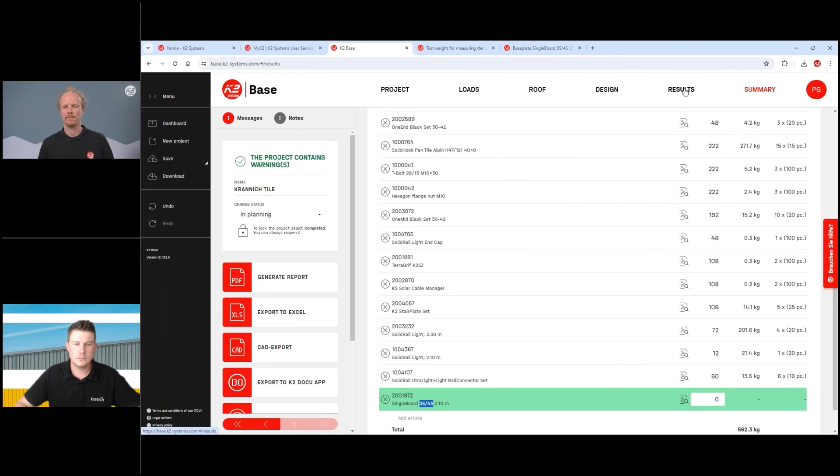Yeah, so we cannot remove the thermal gap. This is something K2 has specified — we don't want to put so much stress on the building. In this specific case, let's imagine we're reaching roughly the maximum. Each module has a force and pressure applied to it, which is then applied into the rail, and this rail is fixed roughly every 1.2 meters into the roof.

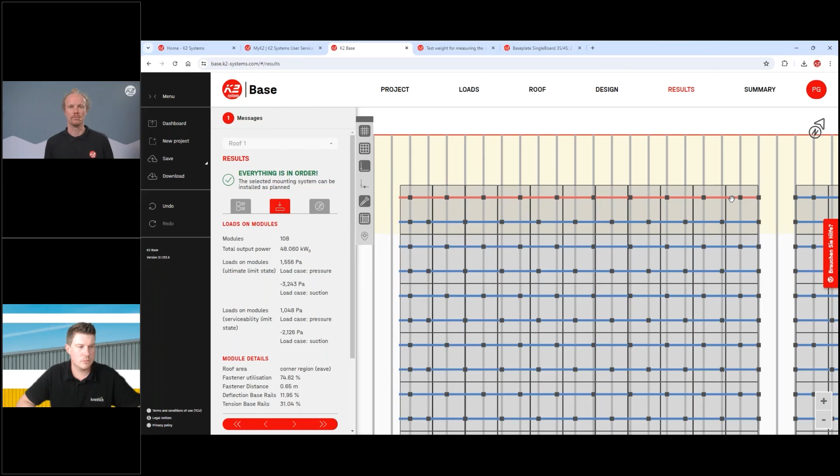In the height of summer, this rail will extend due to thermal expansion, and in the cool of winter it will contract. While this might not be a problem for 1 or 2 years, over time the thermal expansion is going to put extra pressure, an extra load onto the roof that isn't necessary. As I mentioned before, we roughly estimate that for 1 meter of rail, we're going to get 1 millimeter of expansion.

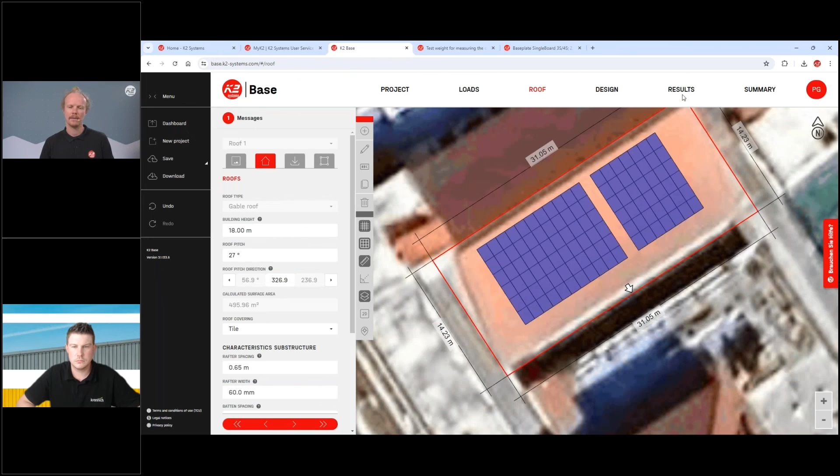In this case, if we were to run a rail across the whole roof, which is 31 meters, there would be stress on the rafter all the way across here, and on the rafter all the way across here, with extra stress because the rails push out in summer and pull in during winter. We want to avoid this stress to a certain extent.

To avoid this stress, we put in thermal spacing. It's a safety factor from K2, but it also helps the building and rafters avoid this extra expansion and contraction. Obviously the building itself will have expansion and contraction, but at a different rate compared to the aluminium profiles.

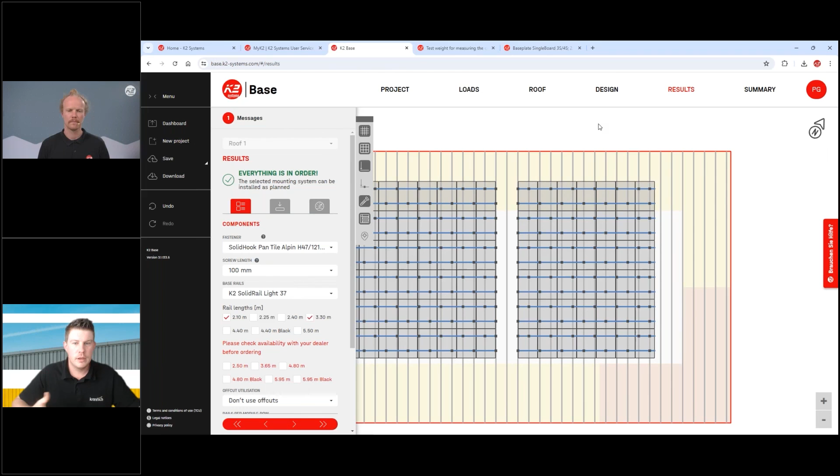Let's come to the last question since time is flying so fast. When I have a rooftop with multiple or different roof types, how can I build up or set up a second or third rooftop?

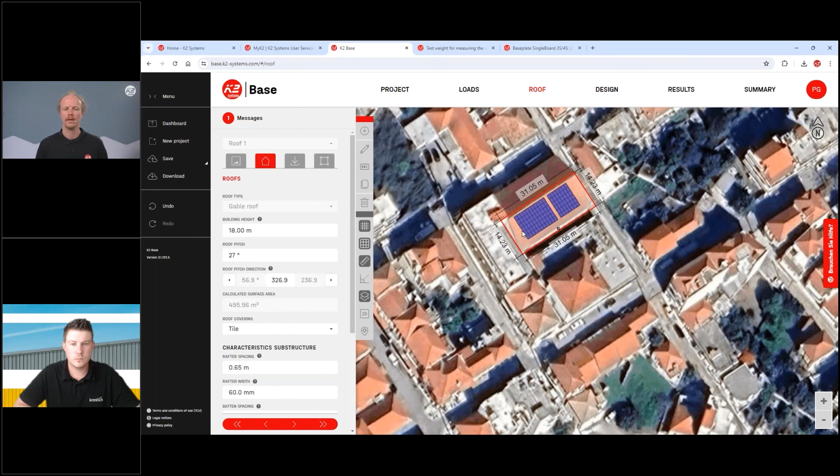Is it possible with the K2 base tool, and how can I blend the second and third rooftop? That's a really good question, because often you'll do multiple ones and you can always add a second roof. So maybe these two buildings are together. On the roof page, I can add a roof, and let's say I want to do this one a little bit differently. This is a different roof type with slightly different characteristics, but we can draw sort of a hip style part of it.

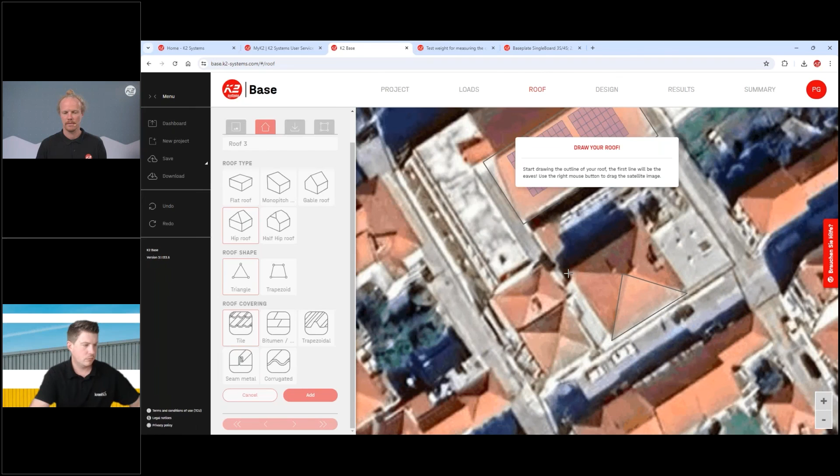Now we can fill out the same building length information we needed for the first roof, and we can even place them next to each other. So if this is now called Roof 3, maybe it's the southern roof, and if we wanted to draw another roof on the same building, we could do the same thing, always starting at the bottom and drawing our roofs next to each other. This isn't perfect because the imaging isn't there, but we can always add a second, third, or fourth roof. Once you get over 15 roofs, the base software slows down a little bit, but for projects like this you can do it quite easily.

Probably just one thing to add as well, if you wanted to draw separate modules, you have exactly the same feature where you can add a second field, which looks a little bit different. So this functionality is in both.